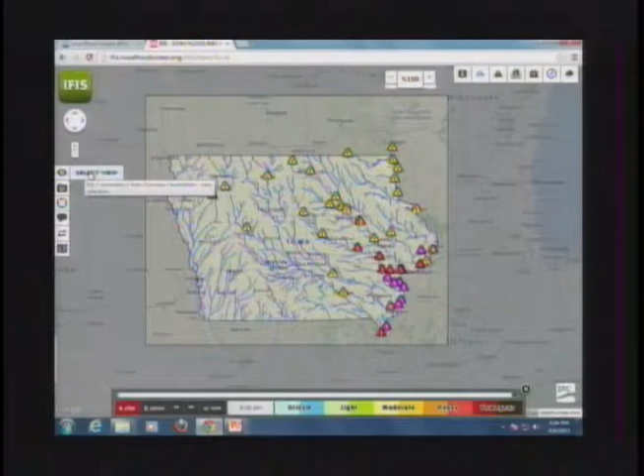But if we want to look at the flood maps, we can launch our flood map interface. You'll note here that we have, let's see, 2, 4, 6, 8, 10, 11 - we have 11 published community-based maps. We have a couple other mapping projects in progress that should be available just over the next couple of weeks. Maquoketa is a project that's queued up, and Sioux City as well.

But if we look at Johnson County or Iowa City, we can load the Iowa City maps. And this gets back to the one river, one map concept.

The current stage reading is 24 feet 11 inches. I think the forecast was about 25 feet 1 inch, and so we might be just coming off of that a bit. But with 24 feet 11 inches, we'll go to 25 feet and look at the extent of inundation for that particular level. Again, the most heavily impacted area is the Iowa City Park area.

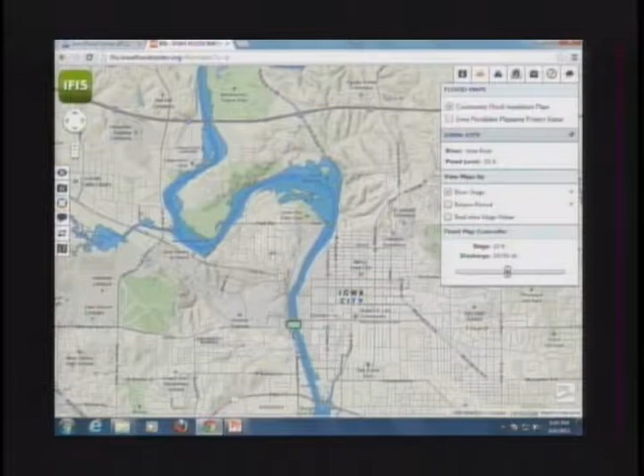Dubuque Street, of course, has water on it, and so we're able to demonstrate the extent of the inundations. As we zoom in, because this is all built on a Google Maps platform, it transitions from the terrain layer to the satellite imagery.

So folks have found this quite useful. We've been out over the last 5 years demonstrating this to every service club that would have us or invite us. Seems like I've had every noon Rotary luncheon available across the state, and I've eaten at just about every ice cream shop in Iowa.

So we've been touring around quite a bit, but nothing has really helped people find out the utility of not only these mapping products, but the stream gauge information, than this last event where our system's been tested. We track how many people go to the system, and to say it's gone up by a couple orders of magnitude is probably pretty reasonable. The load on the system has been tremendous over the last couple days, and it's kept up quite nicely.

So we've heard reports from all throughout Iowa of people going to the website, finding useful information from business owners to homeowners to community leaders, and have been very delighted about that.

We were also involved in a couple media events here following the Johnson County EOC meeting, and when we did speak with the local media in that event, we encouraged them to share the Iowa Flood Center website with their readers or listeners to get the word out so folks would go there and find the information and try it and use it. And I know several of the news media have used it.

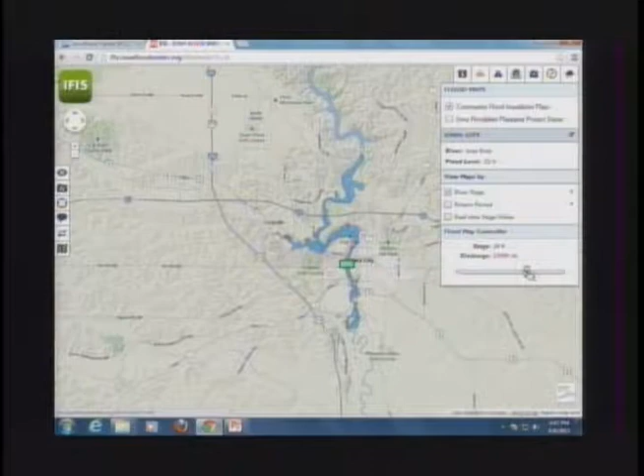Not to bring back memories that are too painful, but if we just remember back to 1993 when we were in about the 28,000 CFS range, or going back to 2008 where the river crested at just greater than 41,000, we start to remember what the extent of the inundations looked like during that period.

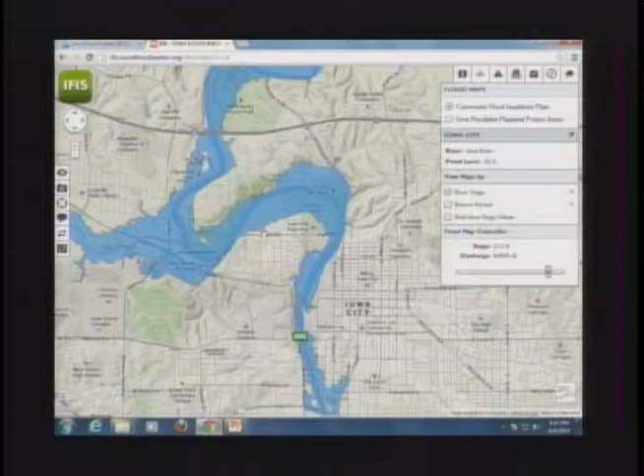I had a chance to meet with some folks today, and during that discussion reminded them that just in this year's event in 2013, the Marengo gauge, which is the last gauge before the Iowa River enters the Coralville Reservoir, had peaked out at around 40,000 CFS this year.

So I hadn't looked exactly, but remember about 40,000 CFS going into the reservoir, and we crested just below 20,000 in the Iowa City area. So the Coralville Reservoir did a tremendous service to the community downstream by attenuating that flow, and we're very happy with that.

We just hope for a good dry period here over the next 5 to 7 or 10 days so we can build back a little more of that flood storage out in Coralville that's so important to all of us.

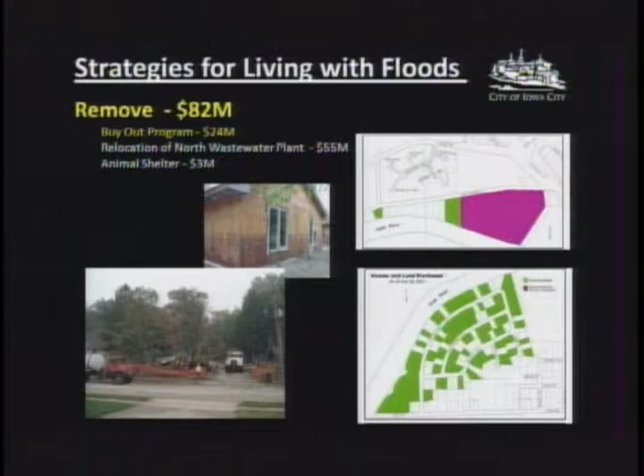Moving to our next project, our largest capital project related to flood mitigation, is the relocation of our north wastewater plant. It is squarely within the floodplain of the Iowa River, and we are removing it from there while expanding the south wastewater treatment facility, in a project that's just over 50% complete. By the end of April next year, we should be fully operational and can take the north plant offline, removing that vulnerability in the Iowa floodplain.

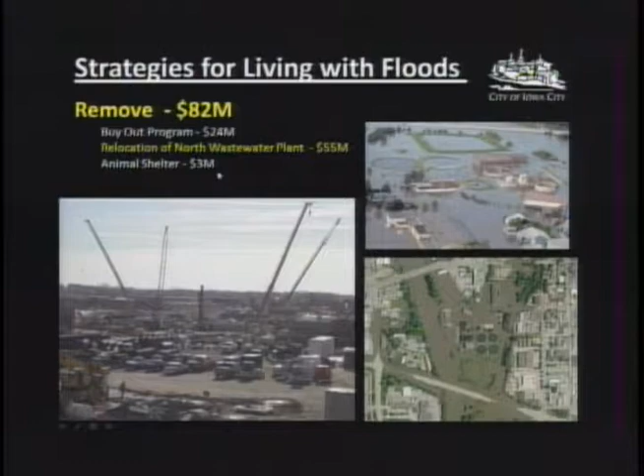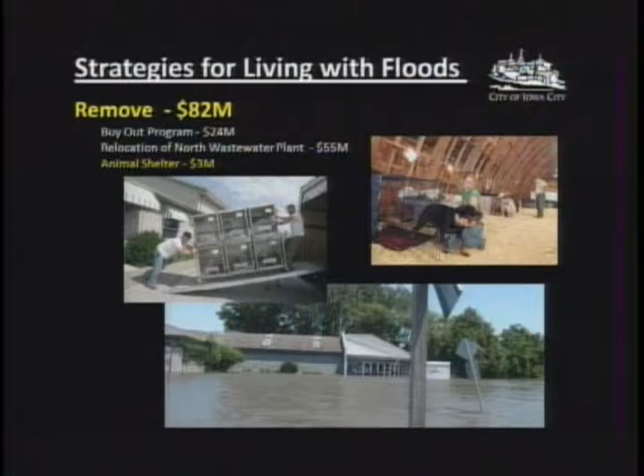The other project in the removal category has to do with our animal shelter, moving it out of the floodplain to a location where we don't need to worry about moving it during future floods.

Let's move into the next strategy, protect. We've got 5 projects there totaling about $54.4 million, and we'll step through those.

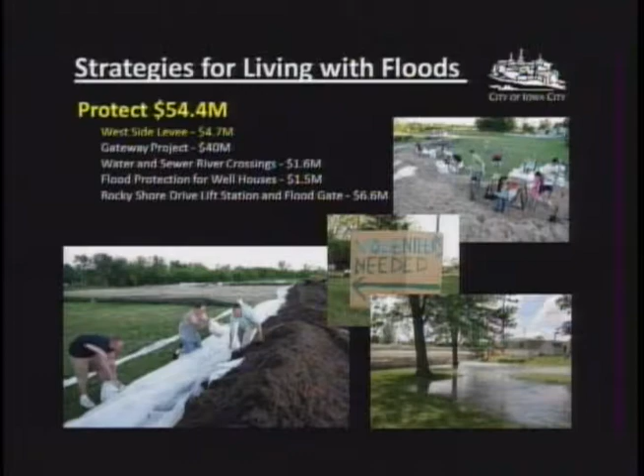The first is the West Side Levee, a project we just awarded; construction hasn't started, but it will protect the Bacchus and Thatcher mobile home courts. The Bacchus court has actually sold and is now owned by Kohl's, so if you hear it referred to that way, you'll know what we mean. It also protects an area along Commercial Court, including a number of businesses there. That's about a $4.7 million project.

The next project is the Gateway project, our largest flood mitigation project, which provides protection in a couple of ways. First, it protects Dubuque Street by elevating it along the corridor between Foster Road and Park Road, a bit south of Park Road, our lowest and most vulnerable arterial street and our primary link between downtown and Interstate 80. That's a very important link for us, it's underwater now, and we hope to see it again toward the end of June.

The other part of this project will replace the Park Road Bridge, shown here. That bridge was observed to produce about 14 inches of backwater during the last flood, so the new bridge will be both wider and higher to eliminate that backwater situation, providing added protection for upstream properties by reducing future flood peaks.

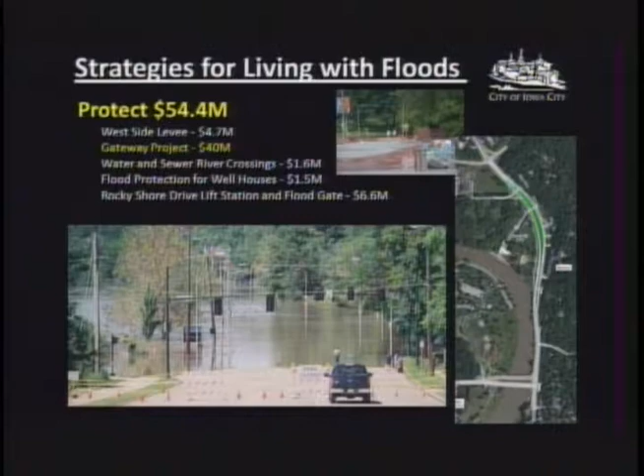The next project is hard to show because it's all underwater. We had two water crossings and three sewer crossings beneath the Iowa River that, after the flood, had been scoured to the point where the pipes were exposed, and one sewer pipe was actually broken. We spent about $1.6 million replacing all 5 of those pipes, placing them lower and well underneath the Iowa riverbed so we're less vulnerable to future floods there.

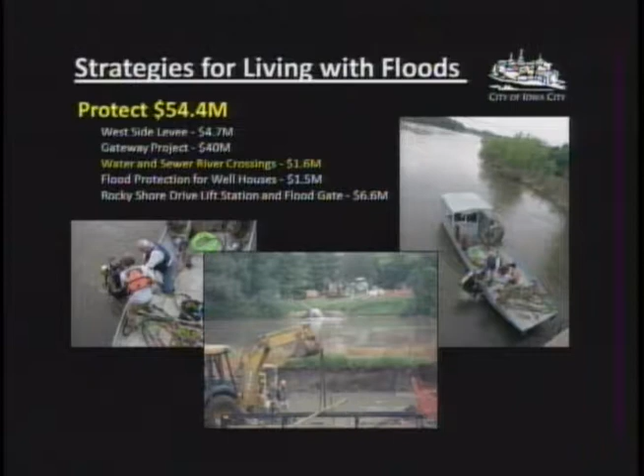Next is the flood protection for our well houses.

For our water supply, our water plant sits high on the hill. It's well out of the floodplain, but our well houses are down into the floodplain because that's where the water is, that's where we go to get it.

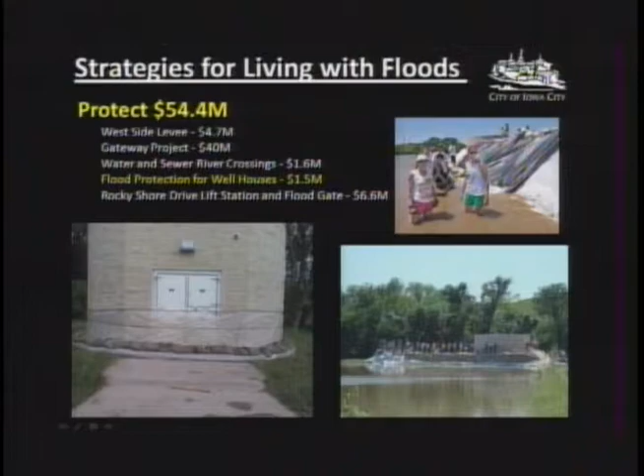In 2008, it took significant effort of sandbagging both the well houses and the power supplies to keep those in operation during the floods. What we have done is elevate the electrical supplies and fortify the buildings so they can withstand the water against them. This is the only preparation that was necessary for the flood we're experiencing right now.

We put some plastic around the building so that if there's a prolonged period of water contact, the limestone won't soak up as much. But other than that, we're ready to go and in a good position there.

Our last protection project is the Rocky Shore Drive lift station and floodgate, part of a comprehensive collaborative project with the city of Coralville. I think there are 5 projects in total that add up to roughly $24 million that will protect this area south of the river and south of Clear Creek.

Our part of the project is putting in a floodgate so we can seal off this opening underneath the railroad, and also putting in pumping capacity so we can deal with the internal drainage that comes from local rainfalls, as well as seepage that comes underneath the railroad tracks.

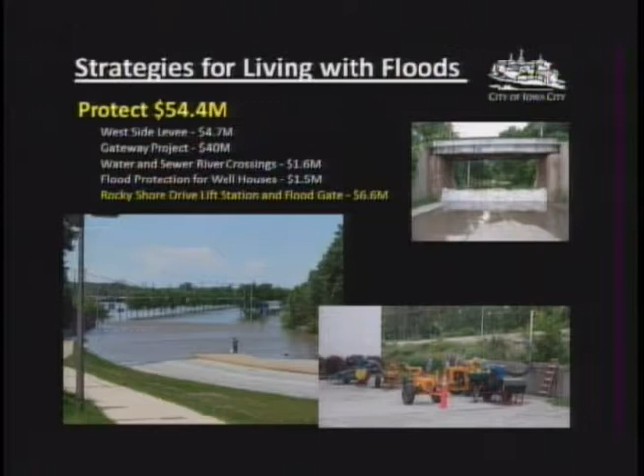Before this area flooded in 2008, we had all the pumps going that you can see there, and that was not enough to keep up with that. We really need a large-scale lift station to deal with that.

Moving on finally into the prevention strategies, there's really 2 aspects of this. One has to do with policy, and the other has to do with purchase. It's important to remember that all flood mitigation isn't bricks and mortar—policy can be a very important part of that.

Iowa City is one of 2 communities in the state that regulates to the 500-year flood elevation, more aptly referred to today as the 0.2% flood hazard area. That is an area that has a 0.2% chance of flooding in any given year, not that there's a 500-year gap between each flood. So that's an important step for us in preventing future damages.

Let's move on and look at open spaces in floodplains that we've been working on since the 1993 flood. We have Peninsula Park, which we spent about $630,000 acquiring after the '93 flood. That accommodates our primary well field for our water supply system, as well as a dog park and a Frisbee golf course, and just a lot of great open space for the community.

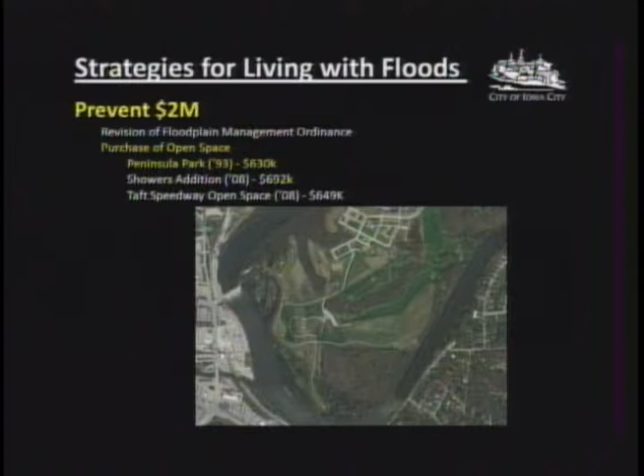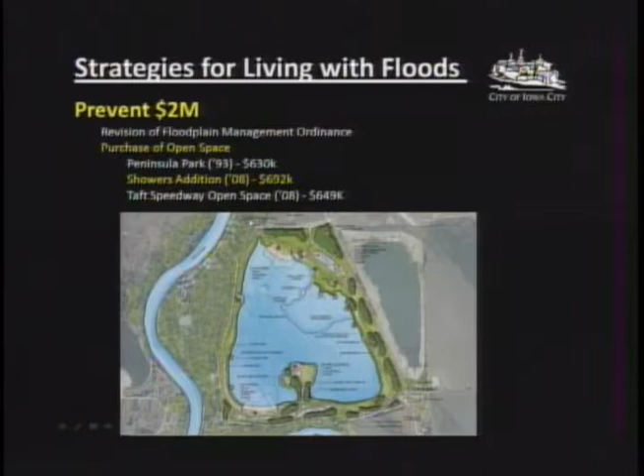We also have the Showers Addition that we bought out after the 2008 flood, which is in the space between the Iowa River and our Terry Trueblood Recreation Area, and it also extends north off this map a little bit. So that's another area we were able to purchase and prevent from future development.

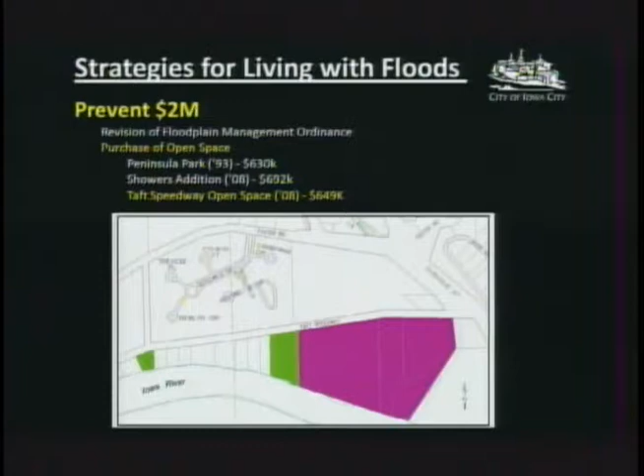I'm sorry, this is a different version than I have. Here—where's this thing? Just go down—right, oh, down there.

Okay, thank you. Well, good evening, thank you all for coming so much. You know, things aren't that different in Coralville than in Iowa City, I guess. We're in this strange place where we're still dealing in some ways with the 2008 flood, we're addressing this current flood, and at the same time having this retrospective—we've been taking lots of calls from reporters about how things are different, how things are the same, what we're dealing with, and it's all very interesting.

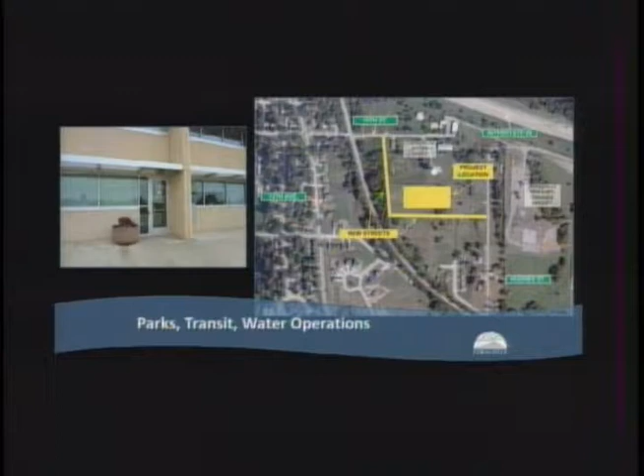This area in particular, if you remember Edgewater Drive, that would have been flooded at about 13,000 CFS from the Coralville Reservoir, which we would have reached early last week. And because of FEMA buyouts, we did not have to deal with that this time, and we were able to build a berm along that place, which is now protection for an entire area.

1st Avenue Bridge over Clear Creek, we were able to access $27 million in iJobs funds. Thank you to the senators in the room.

This allows the bridge to now be longer and wider. It allows the creek to flow under and get to the river more quickly, which certainly allows improvements there.

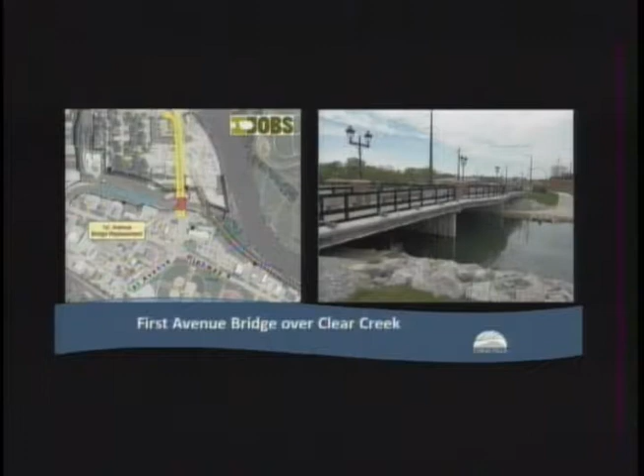Also reconstruction of First Avenue from the creek up to 6th Street. If you travel First Avenue to get to work, which many people do, it is a real improvement. We have a little more work to do on First Avenue, but everyone appreciates the 5 lanes there. Along with that, there was a lot of storm sewer work that really, had it not been for this work, First Avenue would have been underwater this year.

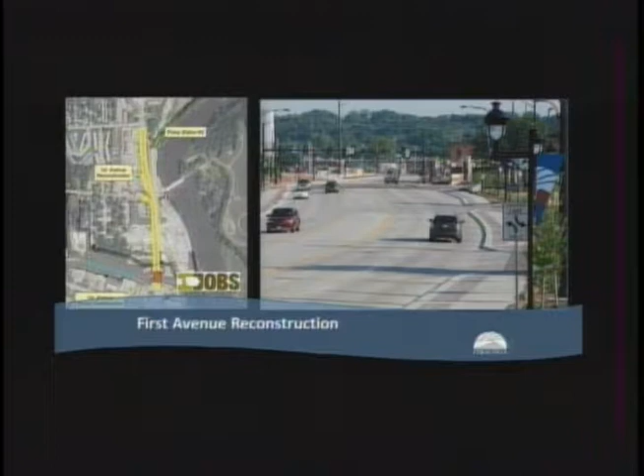The Crandic Corridor project is one we're still working on, but it did work this year. It's not finished, this is a really big project. The railroad runs along First Avenue and then takes a turn with the river behind the Heartland Inn on Highway 6. In 2008, on that Thursday, June 12th, the river went under the railroad embankment. The embankment has always kind of served as a levee, even though it's not necessarily intended to. You can see on the upper left where the river went through underneath, and that's when really all the protection, the sandbagging we had done for 10 days, really was lost.

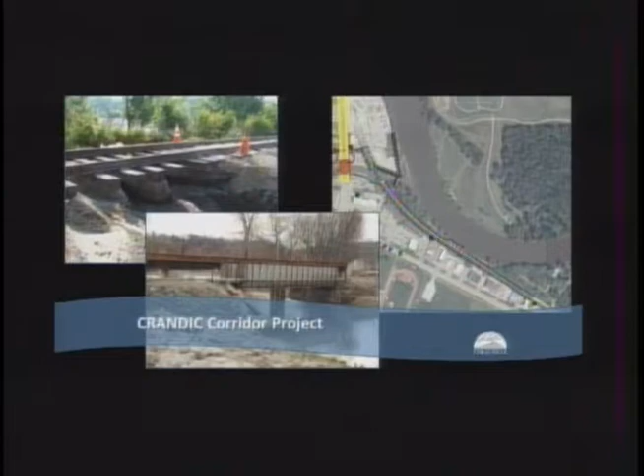So we said, let's make that better. You can see now the new bridge. This is a little hard to see, but this is the new bridge. It's a little bit like what we did on First Avenue. This is the old bridge. You can see how much more quickly Clear Creek's going to be able to go through there and get to the river and not back up. It had a damming effect.

We're also raising the embankment and getting rid of the ballast, putting in clay fill that's going to be engineered to hold the water back. There are also berms and walls associated with that. This is one of those projects that Rick was talking about, associated with what they're doing on Rocky Shore Drive.

It also includes Iowa River Power Restaurant. I'm sure you're all familiar with the Iowa River Power pedestrian bridge, it's a great place to watch the river, really popular over this last weekend, I noticed. It's also going to include a walkway on the river side of the restaurant, and that will include some flood walls there too.

So what that did for us was it put us in a much better position this year. Since 2008, we've completed or are in the process of putting in over $60 million of flood protection. We've had great success and great luck and great support with CDBG grants, iJobs grants, and the Economic Development Administration.

So this year we used about 3,000 feet of temporary sandbags. We used some tubes, we used the HESCO barriers that they also use, I know, at the University of Iowa. I want to back up one more - there's a lot more I could tell you about the flood walls and berms and stormwater pump stations we've put in. They all do their job. They aren't particularly exciting to some of us, but they're doing their job and they saved us this year.

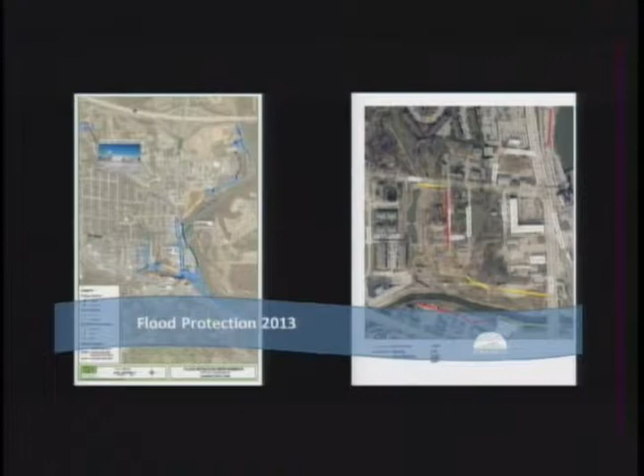So the last thing I'd like to talk about is Old Town. Old Town is an area that we use city funds to buy out. It's the area that would be west of 1st Avenue, north of Clear Creek, and east of Biscuit Creek, south of 5th Street. It's about 12 acres. We use city funds, so we are allowed to redevelop it. We're going to redevelop it at 1 foot above the 100-year floodplain.

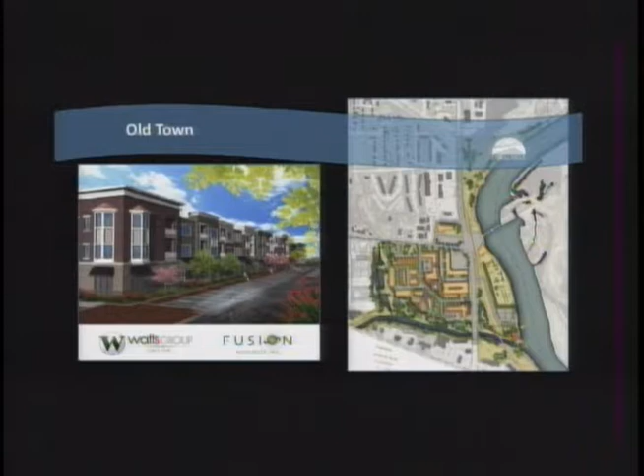Last year we issued an RFP for redevelopment. We had 2 proposals and we selected the Watts team for redevelopment. They're working with Fusion Architects, and it's under consideration by the City Council right now. What they're proposing, you can see here on the left - we've got about 12,000 square feet of commercial space, some multifamily buildings, and then some townhomes that will complete the space, about 140 units total.

Included in that project, they will be building the berm on the north side of Clear Creek - that's one area where we still do not have flood protection. Along with that, a trail, and there will be a 2-acre park in the area as well. They're going to get started on that just as soon as we have approval from the City Council later this summer.

And then we'll have buildings complete in 2015. So that's one of the bright spots that has come out of the flood. Certainly it's hard for those that can no longer be in their homes, but it's also something we can say puts them in a safer place. From that, we're going to have new development. I appreciate all the support we've had from FEMA and the legislature to do the projects we've done. It's certainly made dealing with this year's flood event much easier.

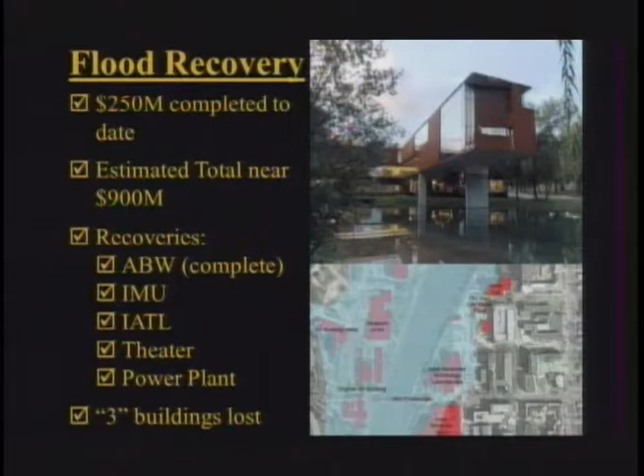In this case, the FEMA historians judged this building eligible for historic consideration after just 2 years. The reason, they stated, was that it was so evident by its acclaim and award that in 48 years this building would represent the highest end of architecture for this period - so they considered it important now.

That allowed us to move forward with a project that would maintain the architecture of the building as it was designed and construct what we call an invisible wall. Some are calling it a vanishing wall, but ultimately it's not very invisible. When put in place, it creates a 900-foot barrier around the entire site, and it is in place right now.

Interestingly, this year, as our flood emergency plan was put into place with the threats that came this last week, we began to assemble this wall according to that plan. It was expected to take 5 days. It took 3 days. The pieces and parts that put this together came together very nicely and fortify the building against any flood threats as they may come. We're hopeful it's a careful effort that isn't needed this year, but it will remain there until we're certain that's the case.

It is the first of our projects to go all the way through the FEMA process for recovery and obligation, and then ultimately the construction of that project. The students were back in the building. We've closed it for the summer, but they'll be back in the building this fall.

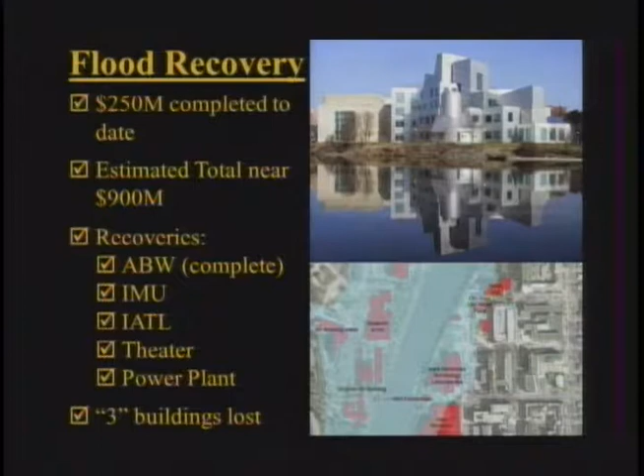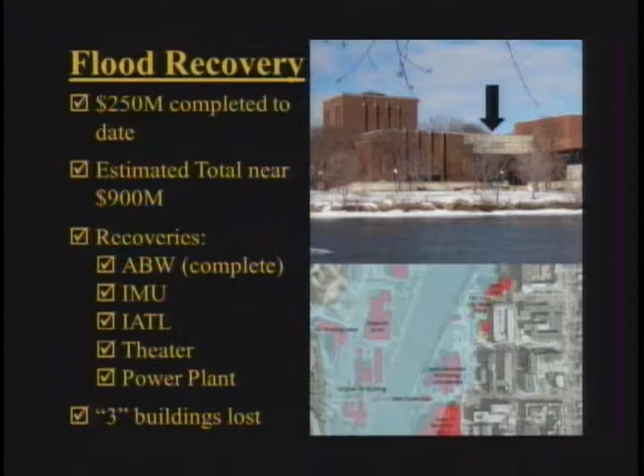The project will not fund a complete protection of that building from floodwaters. It's not cost effective in FEMA's eyes, and as such, we're going to protect the systems in the building.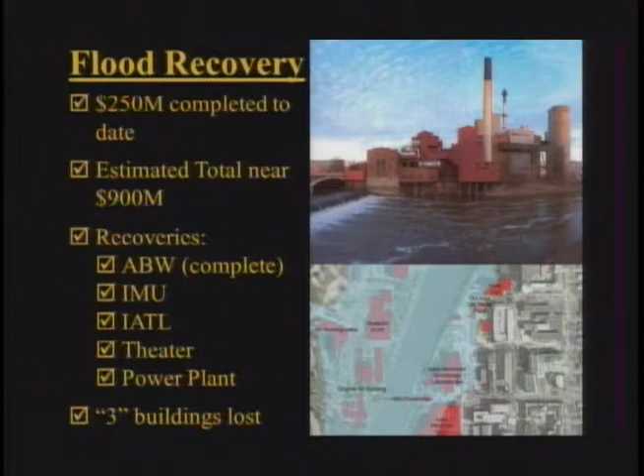And then I'll mention quickly the power plant. It's our lifeblood for our campus. It shut down in 2008, 2 a.m. on June 14th, when we had 22 feet of standing water in that building. It was at that point this campus went black, and it is ultimately important that it is protected. It is fully operational now, but still susceptible to major 2008 stage flooding. We have protected it to the levels that we need this year, but we're still working through very difficult issues with FEMA and appeals with FEMA to be able to fund the ultimate permanent protection of that building.

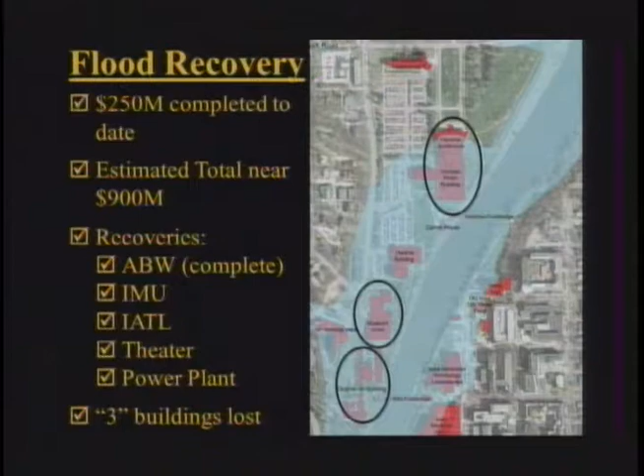And then finally, back to the map for what we would refer to as our 3 lost buildings. 2 of them have a different story than the third, and I'll talk about each of these projects. First, our art building. The lower left-hand corner shows the art building as it was built in 1936. It was the first building on the arts campus. Many additions since then, and you can see what it looked like in 2008.

The FEMA historians did require that we protect the original 1936 portion of this building, but we will be removing or raising all of the additions that surround it in the coming months. We'll start that project later this summer, as long as we can get all of our barriers that surround the building out of its way.

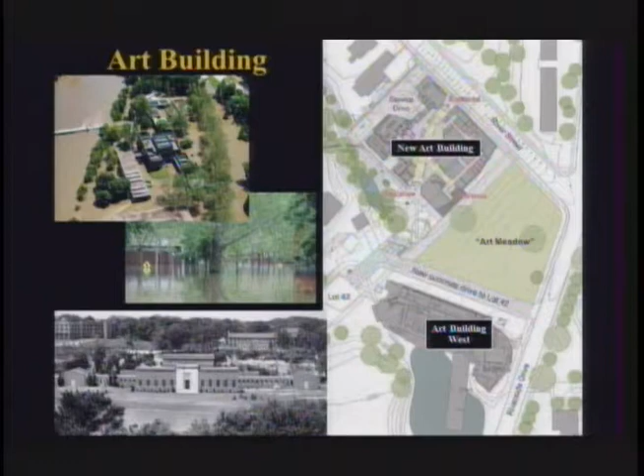In the meantime, we are replacing the square footage for that program up the hill. On the site plan shown on the right-hand side, here's Art Building West that we spoke about, Riverside and River Street. The new building up the hill, safely away from any flood risks, will go to the north and to the west.

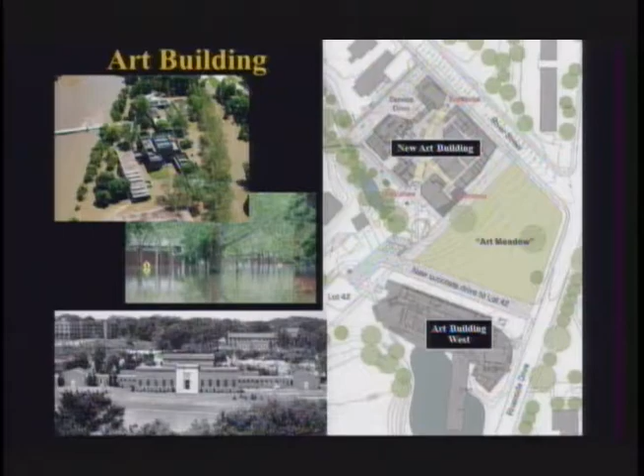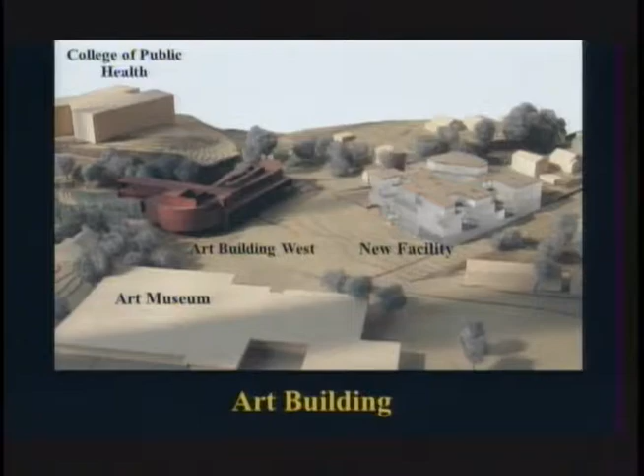A study model for this building is being designed by the same architect who designed Art Building West, Steven Holl, in partnership with BNIM Iowa. You can see the model for the building and then the rendering for the building.

We actually just bid this project this last week. The bids came in under budget, which is a good thing. We're doing so much work, we're in the midst of an 18-month period where the University of Iowa is bidding roughly $1 billion worth of construction. One of our concerns is human capital, having enough contractors to do all the work we have. In this case, the largest single bid for flood recovery on our campus came in at just under $50 million construction bid, and was below the estimate.

This project will move forward and we'll be complete with it in 2016. The second loss, Hancher Voxman Clapp, a 300,000 square foot facility, the Performing Arts Center to the north and the School of Music to the south. FEMA recognized that the building could not be replaced on our campus on one site because of its size, and allowed us to split the two programs into two different sites.

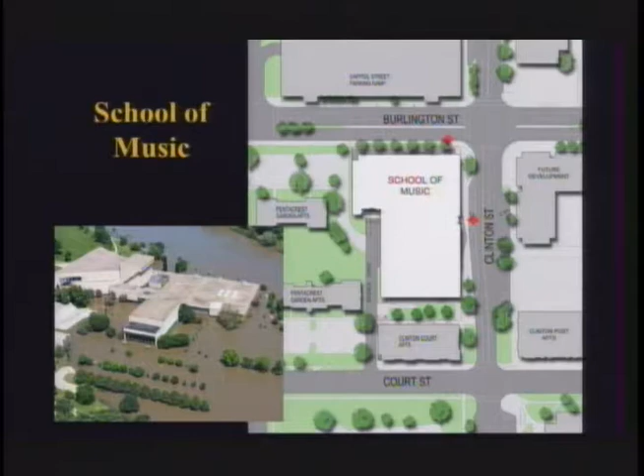We see it as a transformational project to recover our School of Music, but also for downtown Iowa City. The School of Music offers as many as 400 performances a year from students, faculty, and visiting scholars, and most of those are free, and most were not known about by the general public in its former location. Now in the heart of Iowa City, we believe it's a difference maker all around.

And then the one that often garners the most public attention, the replacement of Hancher, moved to the north of its current site. The first packages have been bid and we have started construction. You can see the construction fencing in place and are well underway. We're expecting completion of this project.

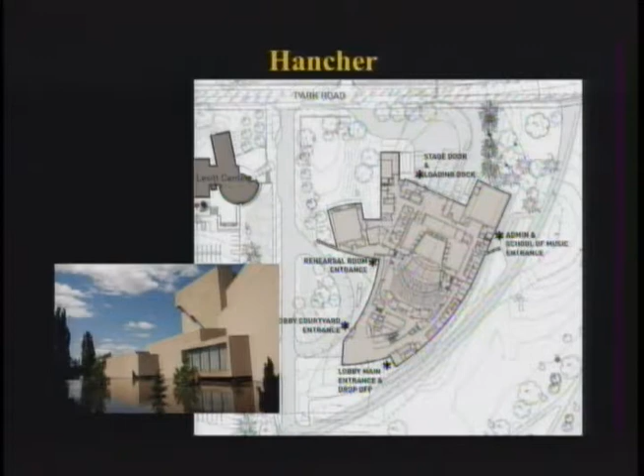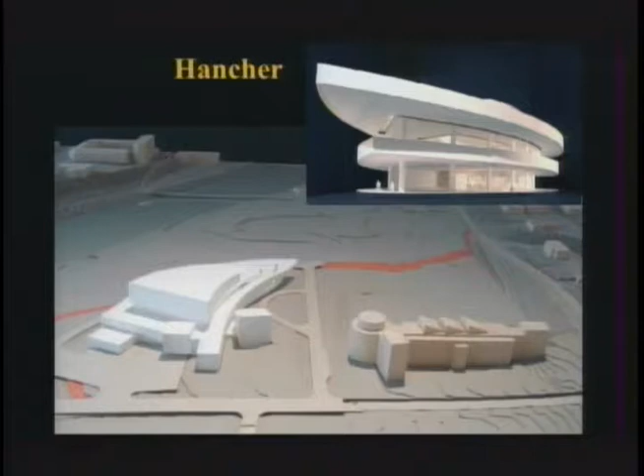Here are some study models showing what that building will look like. Cesar Pelli is the architect, Pelli Clarke Pelli out of New Haven, Connecticut, working with OPN Architects out of Cedar Rapids to complete this project. It is the largest of our replacement projects, a rendering from across the river of the building with the Levitt Center in the background. And finally, our Museum of Art.

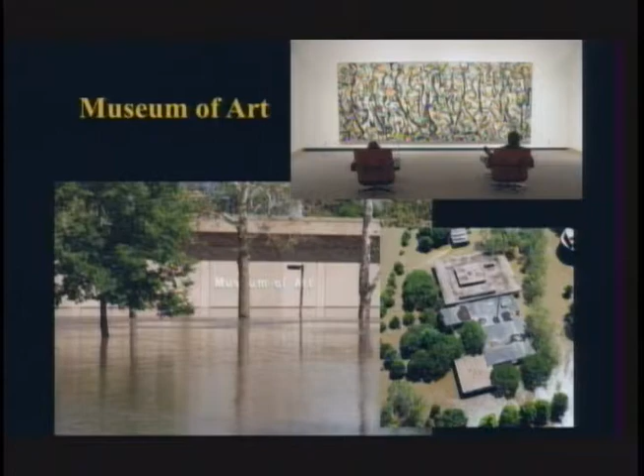At the same time, the damage to the building was not at a level that tripped the 50% rule for FEMA, saying the building should be replaced, and as such, the only thing they will do is repair the building. Just this week, we received Board of Regents approval to move forward with two projects: one, to construct a new Museum of Art to bring our art back to our campus. A majority of it is being stored and viewed by the public at the Figge Museum in Davenport. But a second project to recover the former museum, to be reprogrammed for other academic needs on our campus.

So we'll run both of those projects. The recovery will be in partnership with FEMA. The new museum will be non-federalized and will be our responsibility. That's a tough task when we start with a project at zero and move forward from there. But we've got a lot of creative and committed people to this endeavor, and we will be advancing projects that include partnerships and all kinds of creative opportunities for us to bring the arts collection back to our campus and to our community.

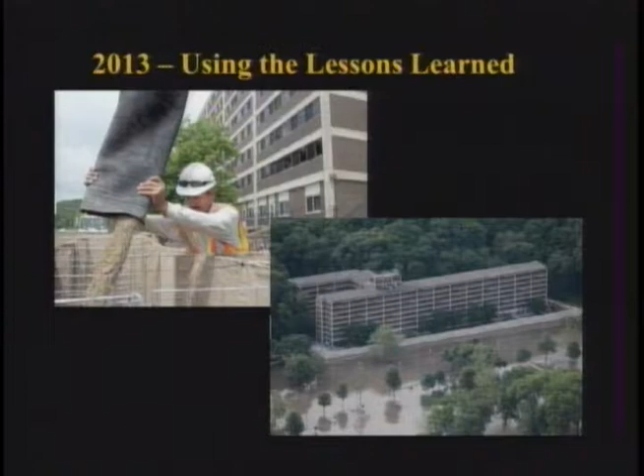It would be remiss if I didn't show a couple of shots from this year. There are lessons, many lessons to be learned from 2008, and it was a very different environment when we were hit with the floods of 2008. I think, though there were a lot of people working exceptionally hard and a lot of stress over this last week, the orderly response has been pretty impressive from where I have sat and watched it occur.

This is a photograph, an in-action shot at the Mayflower. As you can see, the HESCO barrier that we assembled there in a matter of a couple of days, utilizing flood center maps, let us know exactly how long we could leave contractors in that area before the elevating floodwaters would reach the HESCO barrier. It is engaged with the HESCO barrier wall now. It's doing its job, as you can see, it fully surrounds that site. Ultimately, we will create a permanent solution there that will replicate this with a full-size flood wall that will sit in front of the building.

It should be noted that Iowa City's project to elevate Dubuque Street, which we are working in full coordination with, and they're involving us in their design efforts, does not protect Mayflower. It elevates the roadway, but has to allow water to pass through because of the rains and events that could occur on the backside of that. So our flood wall will still be required to make this a permanent protection. And some of the other HESCO barrier wall protections we have along very important buildings that are currently not permanently protected, but will be as we move forward with our recovery.

This is the end of my slide, but before we get to questions, I was urged into showing a clip that I'm often asked, and I think you people are often asked, what has it been like over the last several years putting up with this flood and working with FEMA and the federal government? First of all, it's absolutely been critical that we've had our legislators, local, state, and federal, especially on our major projects. It's become critical for us to push forward with these projects and complete them. But in retrospect, there's a clip that I often show that captures it, at least for me. Now, this clip has University of Iowa graduate Gene Wilder in it. I don't know if you've seen Young Frankenstein before, but this is the clip that wraps it up for me. Let's see if this works for you.